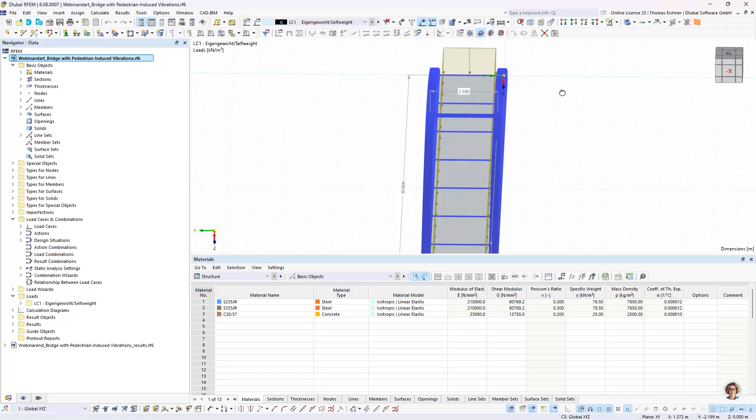connecting those HEB 300. Also in the middle you can find a reinforced concrete surface, flat. It's just 10 centimeters C30/37, and it's just there to create our floor in this case.

For the loadings, it's really important for dynamics in general to try to estimate the real values that occur on the place, because from this loading we will define the masses, and if we get the mass wrong, you can't really use the results, right? So for this model, we will take the self-weight and some dead load that accounts for permanent loads that are built on the structure.

Now we could also think about, for example, giving it a snow load on top, right? But it would change the dynamic behavior of the structure, since the masses are different in that case, but more than 3/4 of the year there wouldn't be snow, so it's not really a good approach in this case. So we're going with these masses here.

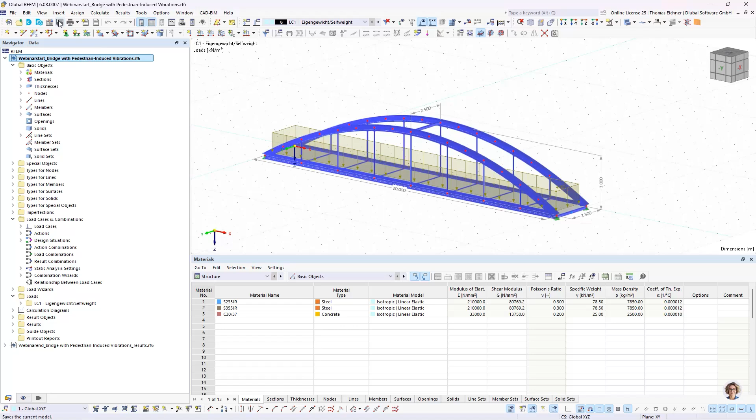Okay, so in the first step, we will try to calculate the eigenfrequencies of the structure, which means we will have to go into our base settings of the program. With the base settings, we can go into the add-ons, and all the dynamic analysis add-ons are within here. You can see the modal analysis, response spectrum analysis, time history, and so on.

And in addition, we have also a special solution add-on that's at least an honorable mention. It's the building model. The building model can simplify, for example, an 8-story reinforced concrete building by using rigid diaphragms into an 8 degree of freedom system. So it can help you simplify a system to be able to interpret the results more easily.

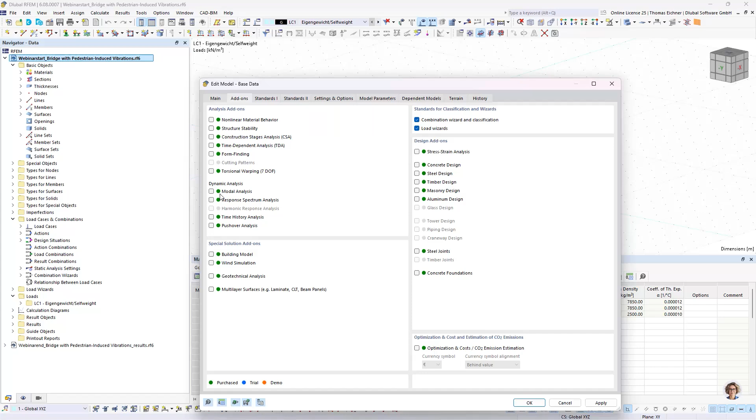So we will start with the modal analysis right here. I'm going to activate it, and we're just going to go through it quite fast. We're just going to create this new load case here of type modal analysis. We will create modal analysis settings, and now we will go for 20 eigenmodes. We will go for full consistent mass matrix, no neglection, only loads in Z direction. So quite standard settings here.

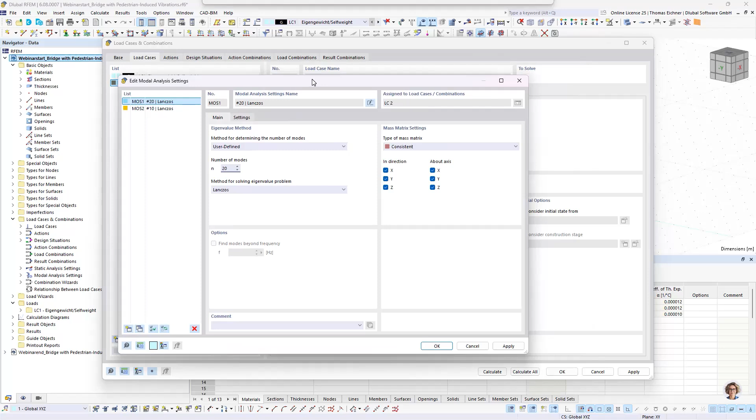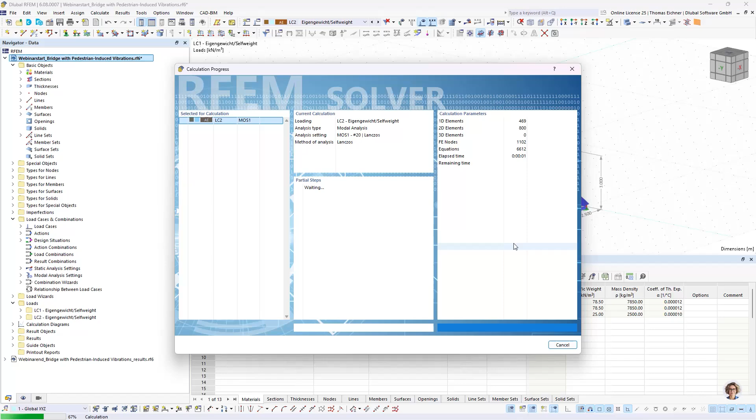There are more explanations on that in our seismic webinar, so feel free to watch that as well. Okay, with that done, we also picked for our masses our only existing other load case. So that's quite easy in this case. And we can just go into the calculation. That should be quite fast, I think about 5 seconds. That's it. Okay, and then we can investigate our eigenfrequencies right now.

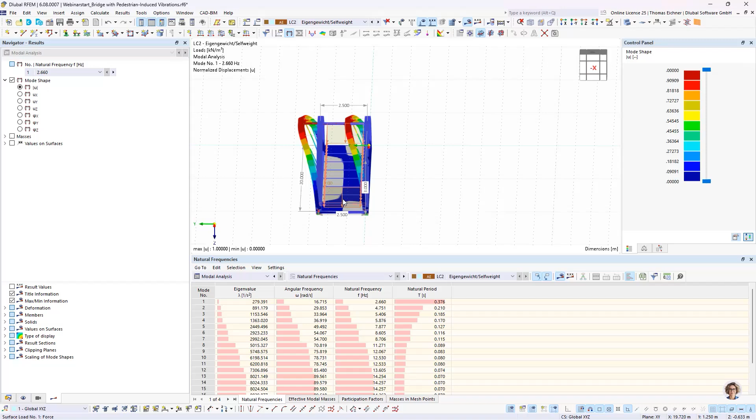So the first one, well, let's first think about what we're gonna investigate here. We wanna have the walking induced vibrations. That means we will apply a foot walker in the middle here, and he's gonna walk over time over the whole bridge. That means we have a vertical loading here, 1 time for the right foot, 1 time for the left foot, and so on.

That also means that, for example, this eigenform does not move in any way in the direction of our loading. So it won't really have an impact on our solution here.

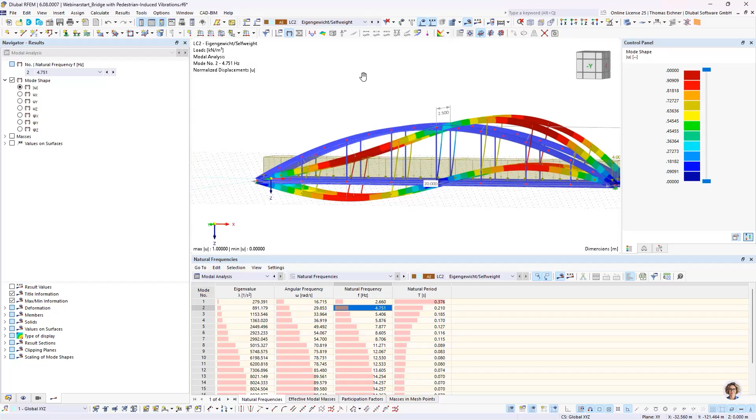That means that eigenform is just not important for us. Let's look into our second one, and that's where, well, it changes. Now we have vertical deformation of the structure, and it's in the same direction as our loading. That means this will be a quite dominant eigenfrequency for our results later on.

And let's also see, this is now our smallest relevant frequency with 4.75 Hertz. Well, the limit value is 5 Hertz, where you don't need an acceleration check. In this case, we are below this 5 Hertz. That means we need this acceleration check, and that's why we need to perform this time history analysis in the following.

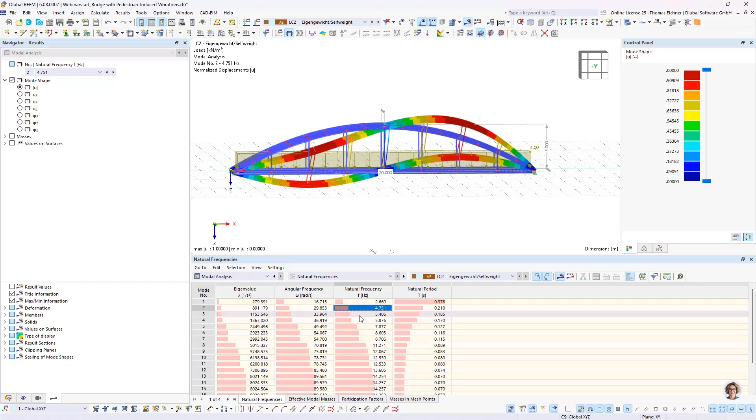So let's also look into some tips how to find relevant frequencies. Maybe you know it from the seismic webinar already. We have also those effective masses here available. And we see now our second one has like 55% about the y-axis, which is quite right. And with that, we know this loading is of importance. So around the y-axis is important for us.

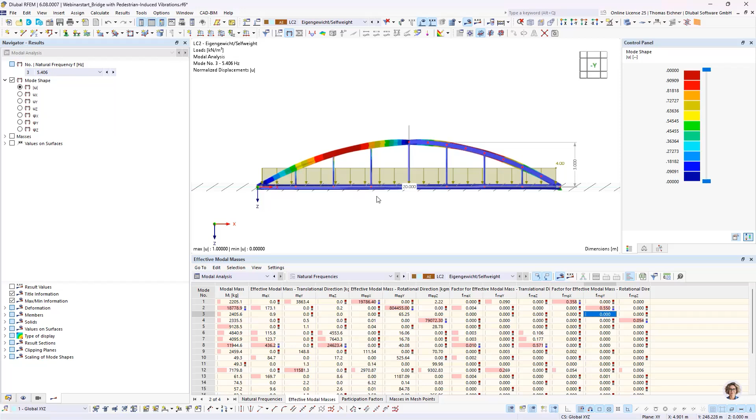So everything that has something in this column. The next thing, of course, would be the Z direction, which is this column. And there we see, for example, the 8th mode has also a deformation in the direction of our loading. And here, just another tip, it's not that simple as in the earthquake analysis, where you have the masses all existing and the masses creating the load. Here you have another load, and only eigenforms that depict in that direction of the load are of importance.

Let's also assume, for an example, in this case, we have a walker that walks over that bridge, but we try to perform the analysis by simplifying it and putting him just on the middle node. Well, then the results could also be not so trustworthy, in my opinion, since let's look at the second eigenform. We have no impact of this eigenform for loading in the middle, and also with the biggest eigenform of the z direction, we also have no impact on this middle form.

So you could almost also put the loading on the support, right? Not exactly, but like for simplification. So here I would recommend really to investigate your own loading and your first frequencies.

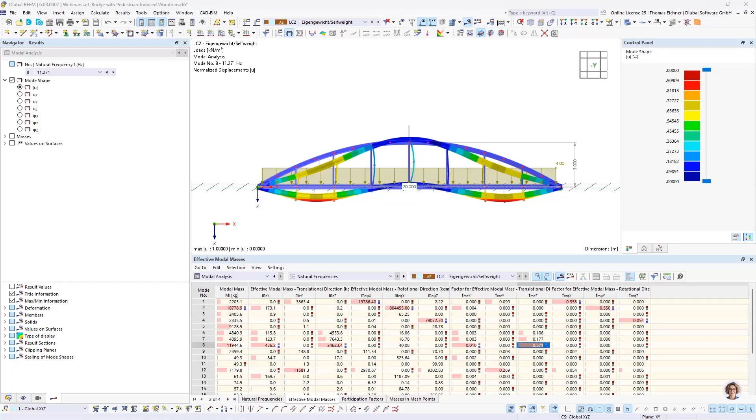Okay, then we can go into our frequency investigation further. We will need our dominant frequencies. That means we have this one with 4.751 Hertz and this one with 11.271 Hertz. And those two values I will keep in my head, since I will use them later on for the definition of damping. Okay, let's go on with the theory.

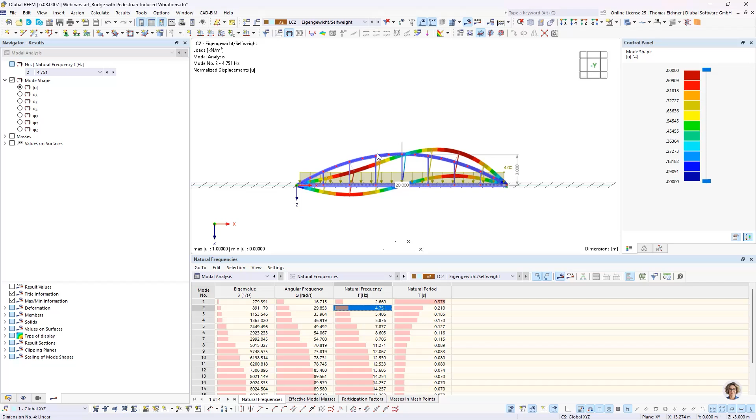Now we will try to apply our footwalker forces on the structure. And we have it right here. That's the vertical loading of the walking. It's referenced to a German literature, Bachmann, 1988. It's the original text. There are also newer texts from 2004, but he references a lot to this 1988 version.

However, there are a dozen different possibilities, or let's say literatures, to define the time function for a footstep. So this is just an example, but you could use whatever function you like for the definition. But we will go with this one. So let's go into this function for a second. We will only think about the descriptions below first.

What we have here is he gives us a step length of 0.6 to 1.0 meters. And for the first part of this walking, we will only look at the local placement of those loads and not about the time. So we don't care yet about the time, and we will only look at this value, and we will pick a step length of 0.625 meters.

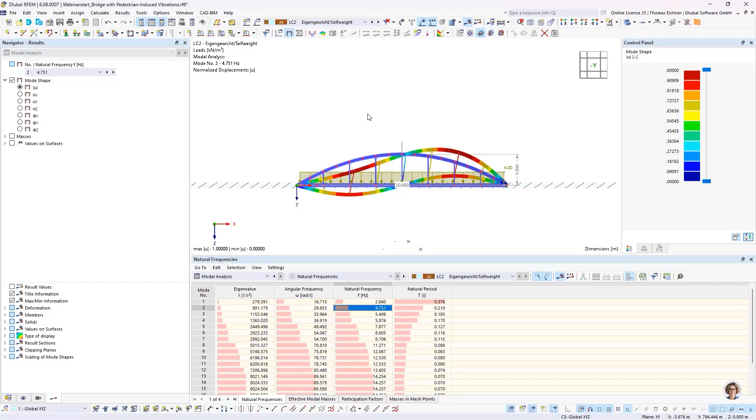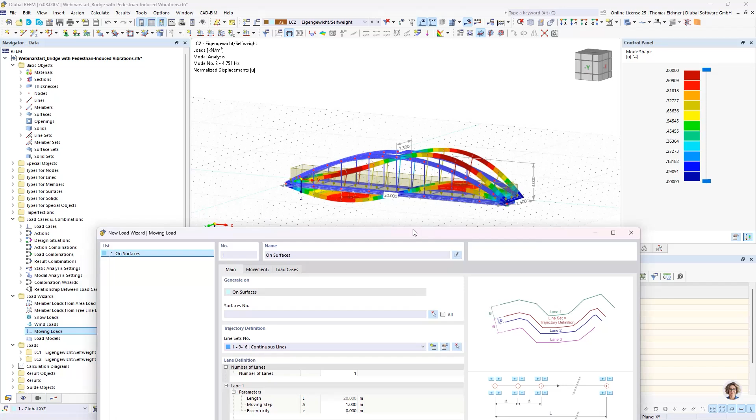So we will go in again. We don't need the time history analysis add-on activated yet, because this can be done even with the basic RFEM. This is just a load wizard, and we can find it within our load wizards in the data navigator, and there we have this moving loads option. With that moving loads option, we can just define how our load will be placed. For that, we need first some reference lines, and those reference lines can be picked right here in this line set.

I did pick them already, but we can also look at them. They are just the lines of the left side of our structure in this case. So we will set the parameters of our walker location with reference to this line. Quite simple. That's also called the trajectory definition, and we can also see it on this image on the right side below, trajectory line.

For the next step, we will have our moving step size. Now this is 1.25 meters. Why? Because we have 2 feet, as I just explained. Between the right foot and the right foot, there's 1.25 meters. Next, we will go with an eccentricity. That means the distance between the trajectory and the place of the loading.

We know the bridge is 2.5 meters in width. With that, we can say we will use 30 centimeters horizontally between left foot and right foot. That means we need here 1.1 meters. And we will have an offset of 0.625 meters.

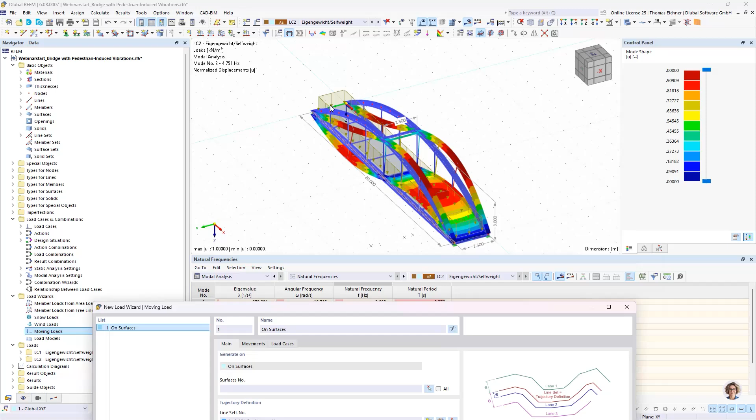That's just because I don't want the load starting right at here or here, because that's just not needed. I assume that's just not dominant for us, or just not having a big impact on the results in this case, since the supports are just next to it, right? But with that we have the geometrical stuff given.

The only thing more is we need to also select the surface to apply those loads on. Lines will be possible also soon, just as a hint, so it's not only restricted to surfaces. And with that we have everything done here. Now we have to define our load.

This can be done here by picking: we have one lane with a load factor of 1, that's okay. Now we can create our new load model. This will be just a single foot walker in our case, and we will go for a unit value of 1 kilonewton. In general, we would want to use 0.8 kilonewton for the loading of the foot walker, but we have multiple ways to achieve it.

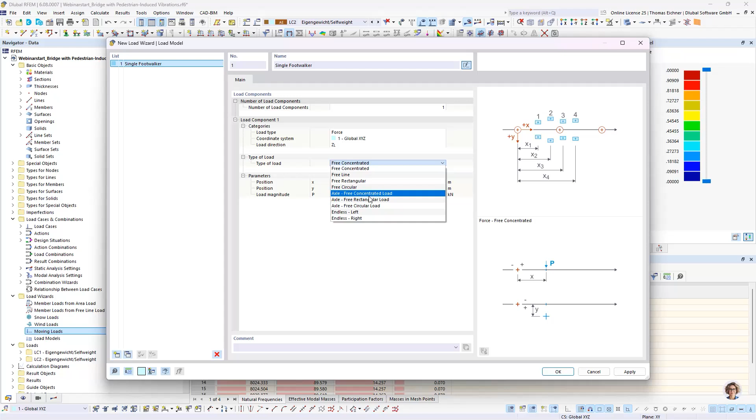We could place 0.8 here, or we could place it in a time diagram, or there are some factors in the program, and you can decide on your own where you want to have the right value, and for all the other values you would need to use unit values. So we will use the unit value here, and I will show you the 0.8 later on in the time diagram. Just for your information, there are also several loads. We could also go for axle loads for vehicles, so a lot more features are available within this load wizard.

So we have the first one, and this will be our right foot, and we will directly copy it. We can also look at the right foot again and in our load cases. There we will see we now have 16 load cases created for us. Because we are in dynamics, I'm going to set them to seismic actions. We will look at the loads graphically as soon as we have the left foot as well. So let's call this left foot.

The loading model stays the same, so the moving step is okay, and we have to adjust the eccentricity, so we need to add these 30 centimeters. Now I'm thinking I did something off here with this value. No, that's quite okay. 1.1 meters, then 30 centimeters, so we will need 1.4 meters right here for this eccentricity. That means we have 30 centimeters between the 2 feet.

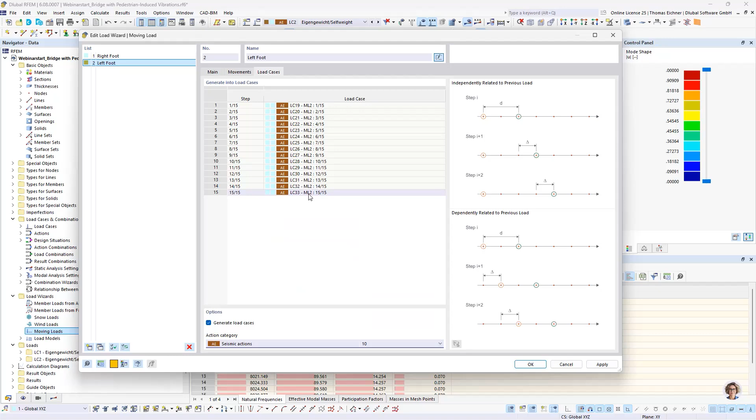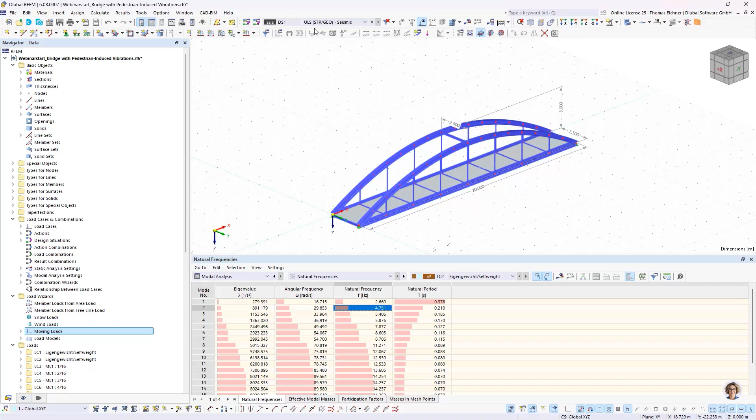With that done, we can go from this side like this and start our animation for our loading. We could also change the speed here, make it slower and everything. But yeah, that's our loading. We also see our trajectory lines here. So we will have this foot walker in the middle, and he will just walk straight up this bridge.

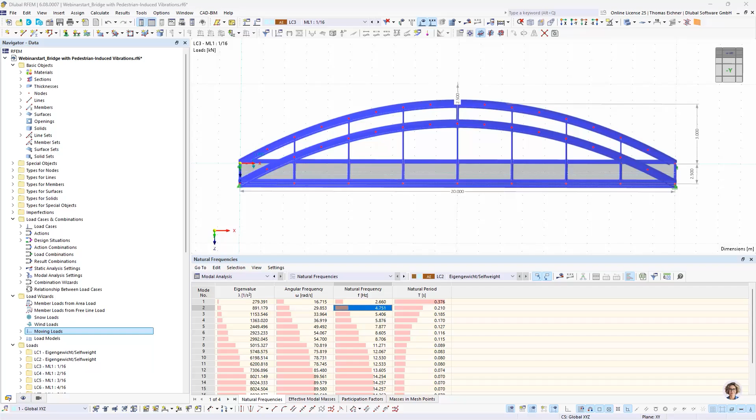Okay. So now we have the locations of the loading, and now we need to take care of the time of the loading. When will it appear, and how long will it appear? For that, we will go into our equation again. And for those who already know it, this here is a Fourier series with 3 harmonics. We have here our step frequency, Fs. We will pick it as 2 Hertz.

This rest here is just a transformation into angular frequency and Fourier coefficient, or it's like the weighting coefficient. And we also have a phase shift. So, therefore I prepared some simple Excel for some understanding here. What I did here is I just plotted those 3 parts of this Fourier series. This means we have the first harmonic. This will have an amplification factor of 0.4.

We have the second harmonic with 4 Hertz. So the first frequency here is 2 Hertz, the second frequency 4, and the third frequency 6. They are called first harmonic, second harmonic, and third harmonic. And we have also a shift of π/2 for the second and third harmonic. We can see from the step frequency itself that our period is 0.5 seconds. So we will also have a 0.5 seconds length for each loading.

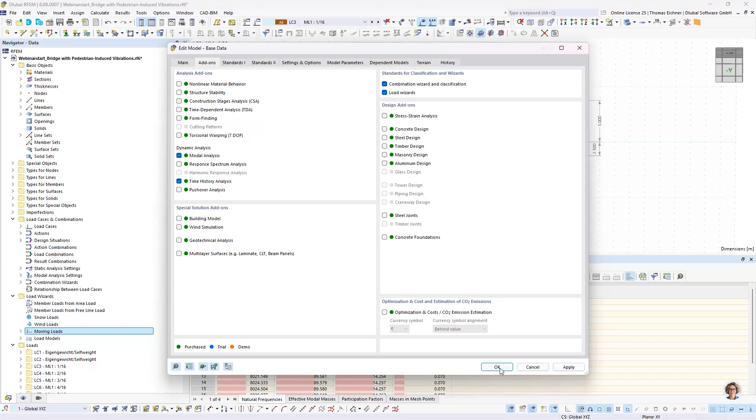Now we can go back here. We can also see big peak and small peak. And let's just define it in our software and inspect it there further. So at first we will activate our response spectrum analysis. And with that, I meant, of course, the time history analysis. So we will activate our time history analysis.

And as a hint, you can also find our dynamic loads on the left side in the data navigator. And we could just change time diagrams really fast by accessing them with the data navigator. It's, in my opinion, the fastest way currently. However, we will go with the ones in our load cases and settings. And yes, so we will start here. First, just some general information.

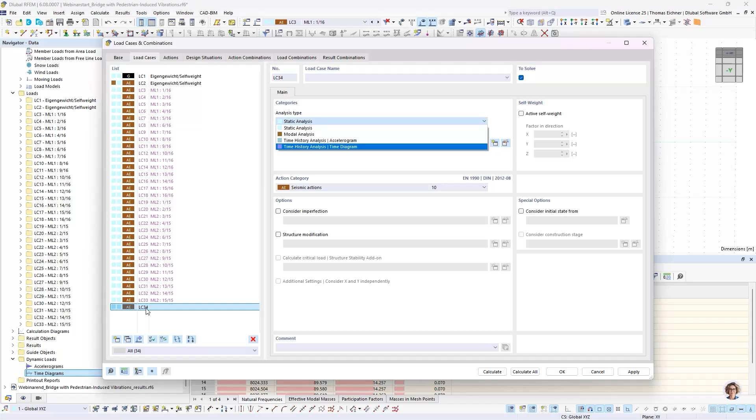We can create time history analysis in load cases. That said, we can create, let's say, the time diagram one, where we would select a time diagram, and all the loading that is defined within this one single load case will be modified with that time diagram. However, we have, I think, 31 load cases, and that means we will have to go with the load combination variant, where we can assign multiple load cases and time diagrams.

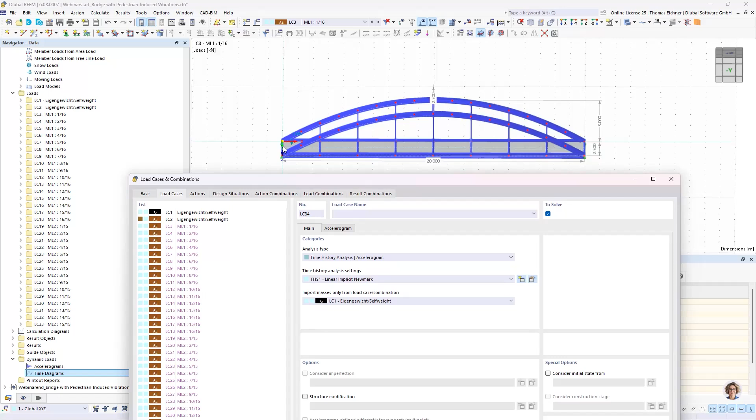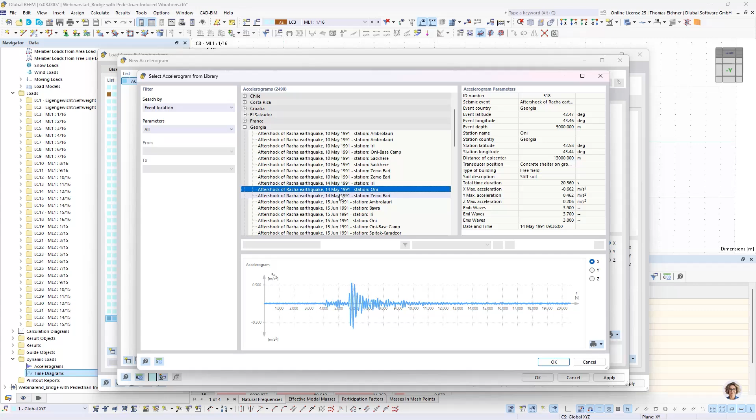Okay, so for the next thing here, what we also can do is select the time history analysis of accelerograms. The good thing is, we don't have to take care of the placement of the loading, because it's just prescribed by ground motion and supports in this case. And with that, we can create accelerograms either with the table, or we can also, of course, take our really quite big accelerogram library here. Quite easy. Just pick the one you would estimate, and then you could investigate the behavior of the structure under this accelerogram. Okay, but that's not the thing we need today.

So I will delete this load case again, and we will go into our load combinations. In our load combinations, we will create a new one that is called time history analysis.

This one, we will ignore this first page for a few minutes and go directly into our assignment sheet, since we don't have something to do with the time history theory yet. We are still just in our loading. So we did our placement of our loadings, but now we will also have to apply the time, so we will have to apply this function according to Bachmann.

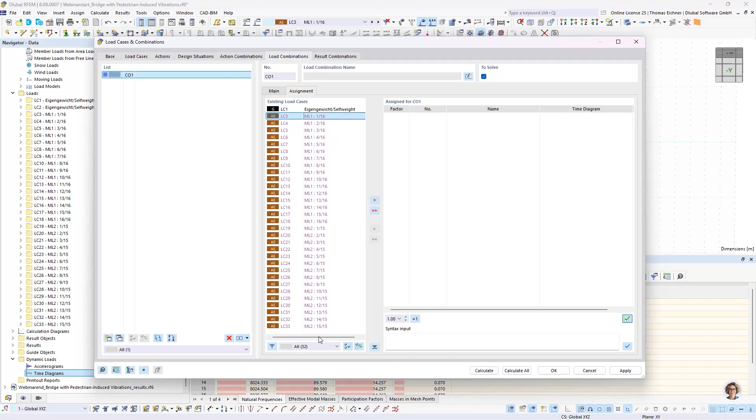And with that said, what we want to do is apply all of our load cases right here. Now we see we have all 16 right steps and all 15 left steps here, and we can assign them like a time diagram right here.

With that, we will go for a new time diagram, and I will just copy paste my function in here, since that's a lot of typing in this case. And there it is.

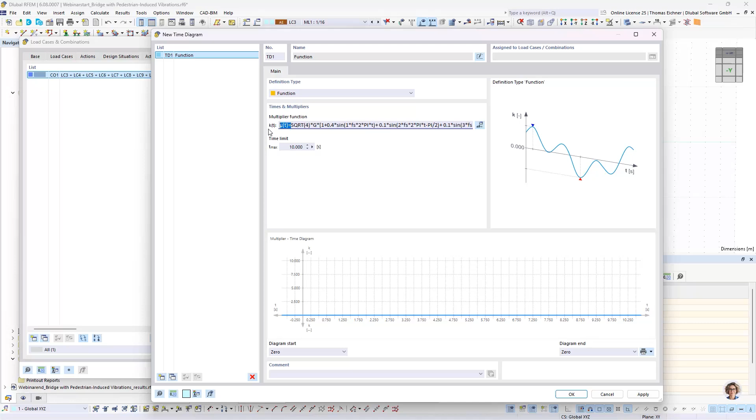What we have here now, we also multiplied it with the number of our footwalkers. We multiplied it with our factor g, and we took the function with the Fourier series in it according to Bachmann. What we now see here is we have a factor of 2000, so there seems to be something wrong.

And that's within the used global parameters here. So I used n, I used g, and I used fs. And now let's look at them.

Since I predefined g with 0.8 kilonewton, but this is just a function, so it's dimensionless, the program will automatically calculate functions within SI units, which means this is like an 800 in this function here. It means we will have to divide it by 1000.

Then we also selected the number of footwalkers, which is 4, and the step frequency of 2. That means if we want to change the step frequency in the end and just press calculate again, we have the results for it - that is possible with this global parameters quite easily.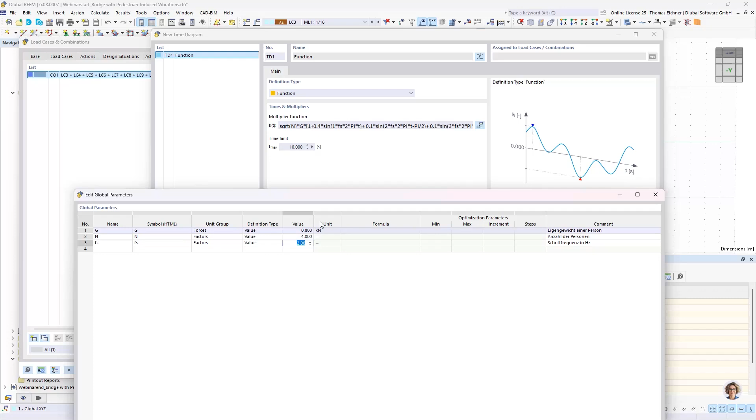Okay, so let's go first for this G adjustment, and then I will explain something about our number of walkers. This divided by 1000.

T max is 0.5, since our length, our period was 0.5 seconds. There it is, big peak, small peak. And we have a maximum factor of 2.5.

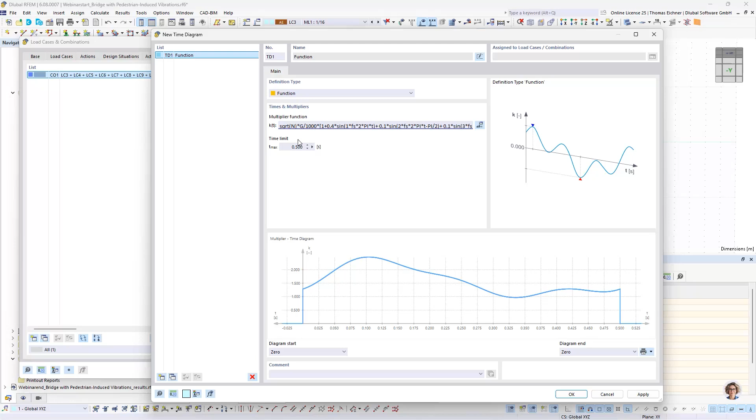Mainly because of this dependence on the number of walkers. So it would be between 0.8 and 1.6, I think. Okay, but with that the function is defined.

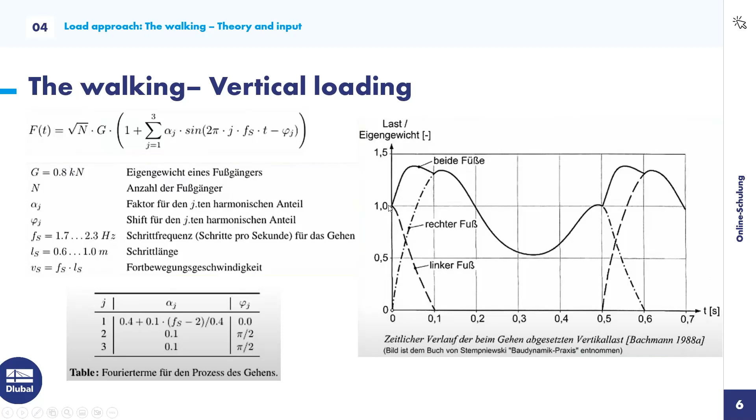Now let's look into our walking theory again. Just as a hint, there's multiple functions for that available - also for horizontal loading, where the influence is quite lower, and also the frequencies are kind of split by half for it.

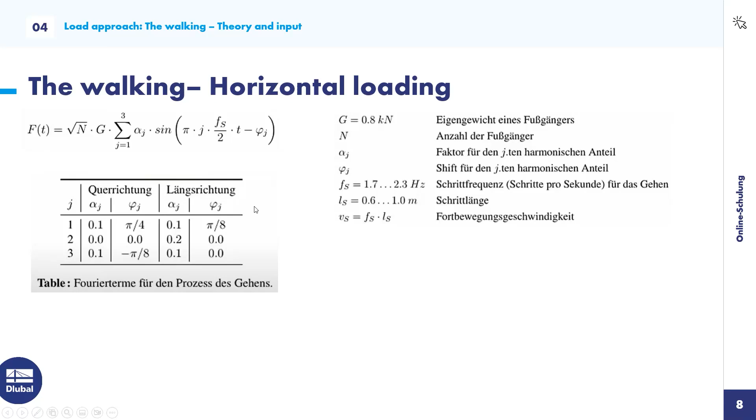And there are also functions for jumping or running. For jumping and running, there's one more benefit, and that's that there are time intervals where no loading is on the structure, because no foot touches the structure.

Okay, let's go for the amount of persons. Well, in general, we have to design for reality, and it's common that not only one person walks about the bridge, so obviously we have to take this also into account.

Multiple persons normally don't walk synchronously. They just walk on their own, and it's quite random, except for military structures where you have an army marching over the bridge. Then this synchronous increasing could also be necessary.

For this today, we will consider the change in location. We have a change in the loading location. And therefore, if our fundamental frequency would be below 2.4 Hertz, we could go for n is 4. We will also go with this simplified approach.

Generally, the number of persons is limited to 9 persons. And the main thing I read about is that this value is estimated by what's estimated to happen, right?

So if you estimate to have a bridge in a rural area, you can go with quite less persons than if you compare a bridge in New York or something. So that's something you just have to take into account here.

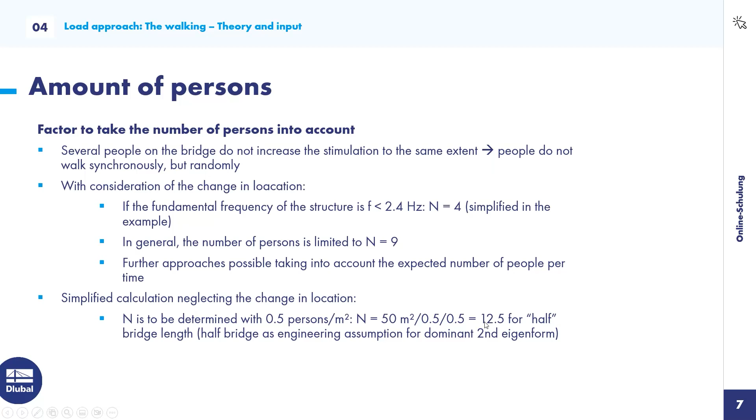Okay, let's go into the program again. That's where the n comes from, right here. So now we have selected one time diagram only. We will select it for all of our time functions, and now that's the great benefit in comparison to RFEM 5.

One more thing here is we need to also apply our time stepping, or time shift. This time shift is new within RFEM 6, that we can define it directly in this table.

Now I will just go. The first right foot is at 0 seconds, then the second right foot at 1 second, and there's always 1 second between, right? So we will just fill it up to 15. Then our first left foot starts at 0.5 seconds, and then we just need to increase that always by 1 second again.

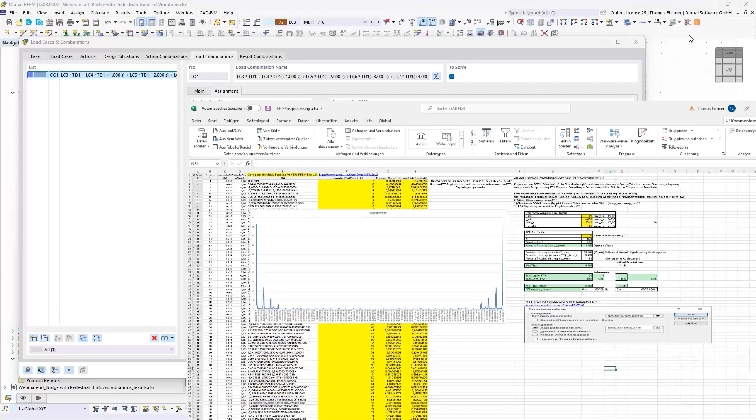So with that said, this is really a great benefit within RFEM 6 right now with this time shift option, because as you can see, we're done already with the assignments. Now we only have to take care of our analysis itself. I'm just gonna go here and go for the linear analysis.

So now we can go on. We have two time history analysis settings, right? One is the linear modal one, and the second one would be the linear implicit one. The modal one uses a modal analysis, which we pick right here, and it also takes all this information - consider initial states, structure modification, and the masses - it just extracts them from the modal analysis.

So the setting making is really simpler, but on the other hand, you had to create a modal analysis beforehand. So you did that kind of before already.

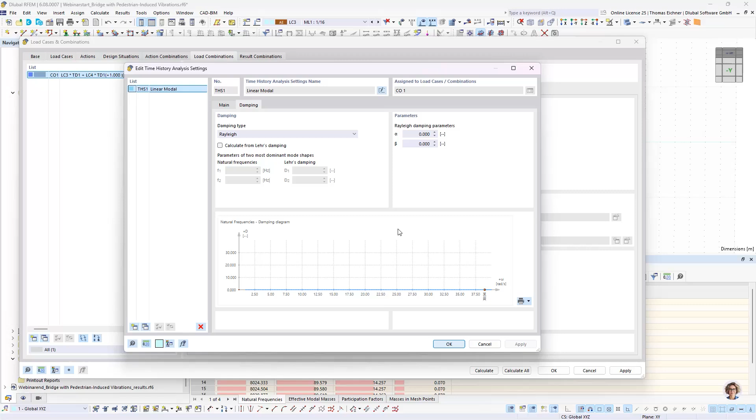Now we can go in and look at the next benefit of this solver type, and that is we can either use Rayleigh damping, but that's not the benefit. The benefit is we can also use a constant Lehr's damping value here, and we will use that, and I'm quite happy whenever I can use it, because we will use 1% damping for our structure here.

From literature, I saw that is quite high, so I would recommend to look in the literature on your own projects for it, because this, I think it's about a factor 2 at least too high. But okay, let's go here now.

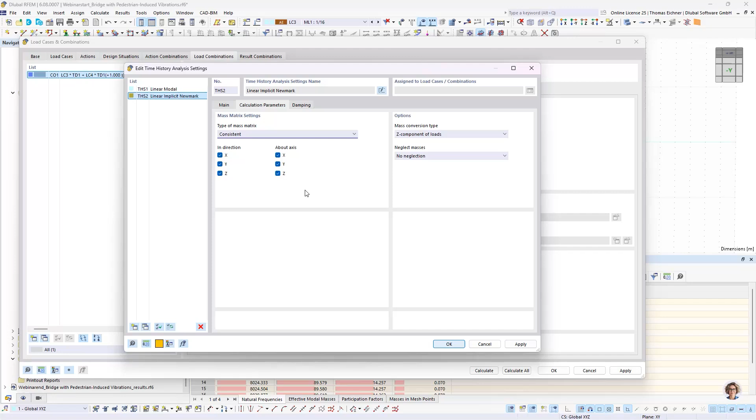We did the damping, now we can take care of our time stepping. But before we take care of our time stepping, I will also introduce you the linear implicit Newmark variant. With that, we have to make the settings for masses again, since we don't use a modal analysis in this case. And the sad thing, or the thing that sometimes occurs in some problems, is we have to use our Rayleigh damping, so our stiffness and mass dependent damping.

We can use two frequencies to calculate those dampings, so we will go here with 0.01, and here with 0.01.

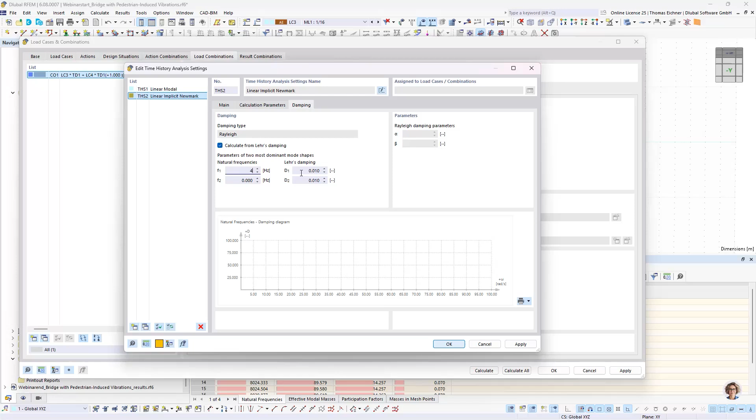And then we will select our frequencies, just think about taking them right in the modal analysis. Our first dominant mode was 4.751 Hertz, and our other one was 11.271 Hertz. There it is.

So now let's talk about this damping approach for a minute, since I see a lot of confusion on it. This damping approach is called mass and stiffness dependent damping. Mass dependent means the alpha value is just a factor for the mass matrix, and the beta value is a factor for the stiffness matrix.

In this way, the damping matrix can be described as a combination of those damping matrices. For the alpha value, what it does is shape a frequency curve that starts at infinity, so the asymptote here would be the y-axis, and the asymptote on the x-axis is the x-axis. The beta value adds an additional asymptote beginning from the origin, with a slope defined right here.

So as soon as you enter beta damping, and you would have an infinity frequency, this infinity frequency would have an infinite damping, kind of. And that can lead to problems, at least in non-linear time history.

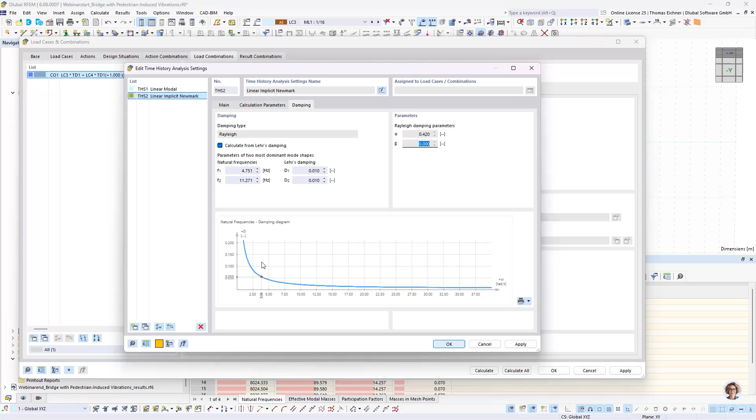Okay, with that done, we can go out of here as well, and we have now our two analysis settings. What we didn't do yet is think about our time settings here. Well, this is quite important, one of the most important things within the time history analysis: the time step choice.

It's a trade-off between the accuracy of the results as well as the calculation time. You have to think about each time step as comparable to a normal static analysis, a little bit more complex since the dynamic equation is a bit more complex. For each time step, you have one of those analyses after each other, because you can't do it in parallel, you have to do them after each other. And that's something where the calculation time, unfortunately, can explode.

Okay, so here are just some recommendations. If you have a function-based excitation and in general have some knowledge on your frequency structures, mainly you always do a modal analysis beforehand. That means you would pick the highest natural frequency, and the time step is just the highest natural period divided by 20. That's the same as this formula: 1 divided by f is T, so T over 20. The same applies for the excitation frequency fe: also here, Te divided by 20.

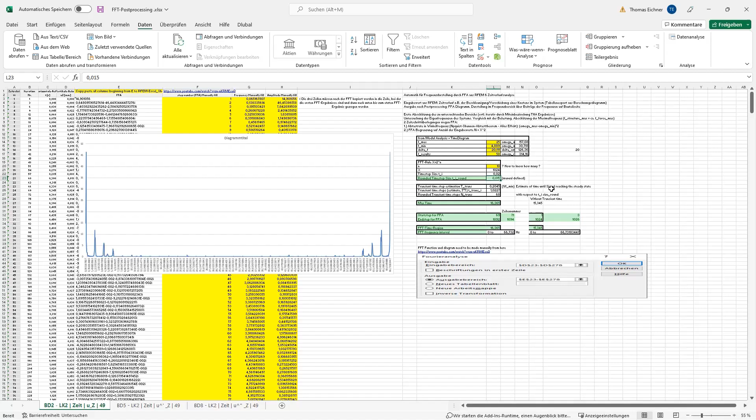And with that, I defined that we will take a 0.015 second time step. Oh, I'm sorry, I will go a bit closer here. So we will go with this 0.015 seconds time step, and we don't care about initial swings or the first few seconds, since they always have some strange results, I would say. But we will just ignore this, and we will take this into account anyway.

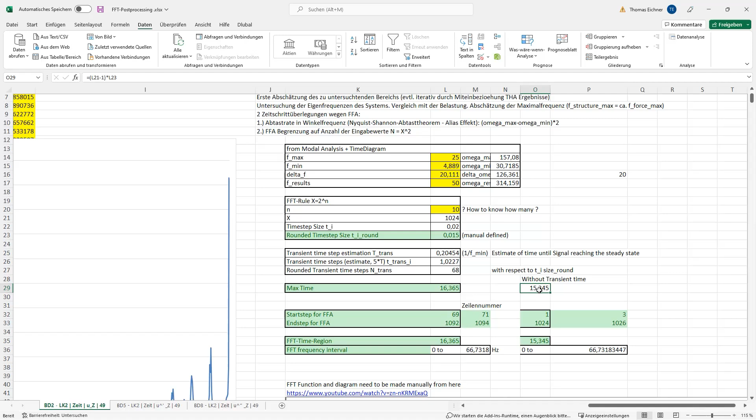So what we do here is, without the transient time, we have a maximum time of 15.345 seconds. This will lead us to a frequency range of 0 to 66 Hertz. And if you know something about this depiction, then that means we can investigate 0 Hertz to 33 Hertz with this analysis, with these settings.

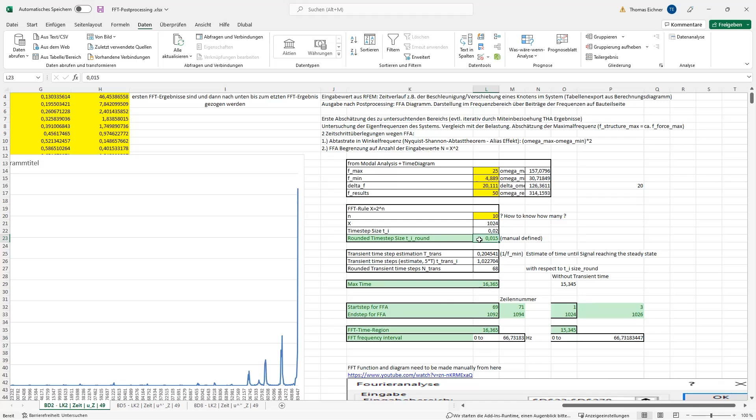Which means that helps us kind of. We know that 33 Hertz is our maximum frequency that is investigated. That means if we have some natural frequency of 50 Hertz, then we made some wrong assumptions here. Then we would need to readjust our time stepping. But okay, let's go with that into the program and just set this time step. So this is 15.345 and this is 0.015.

And this is the saved time step with 0.015 seconds. This is what produces our data. And this is our accuracy time step. That's used for the calculation. So with this combination, we have a calculated time step of 0.005 seconds. But only every third time step is saved.

That's something just since every time step has quite a lot of results. It is needed to reduce the data size. Like 20 gigabyte models can happen in this analysis quite easily. So that's really a point here.

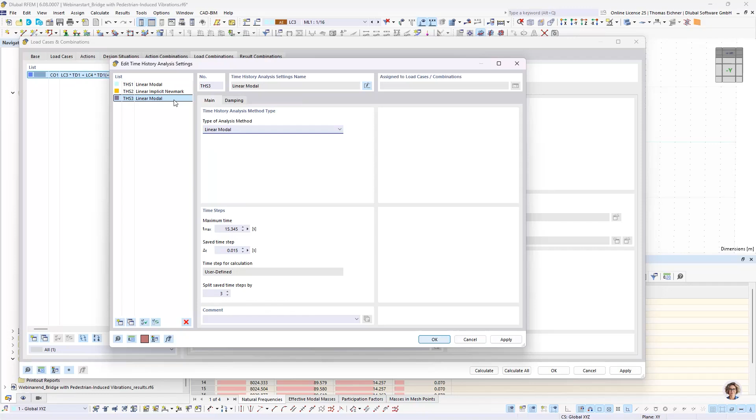Okay. We will do the same with this second one, 15.345, 0.015, and 3. And just as a hint, if we just copy this analysis and would change it here to linear modal, it would be faster. Just an efficiency tip. Okay, with that done, we can click on calculate. And while it's calculating, I can go on the difference of those two analyses again.

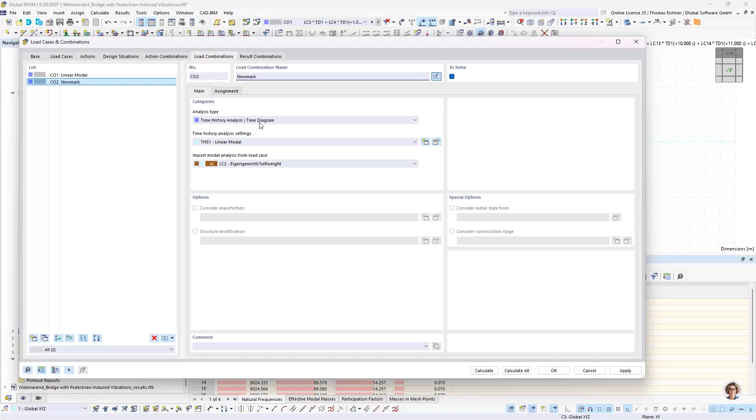Let's cancel it again. I did forget somehow one of those. Yeah, I just didn't do it. Okay, let's call this first load combination linear modal analysis. And then I did forget to apply a second load combination and apply the Newmark analysis settings for it.

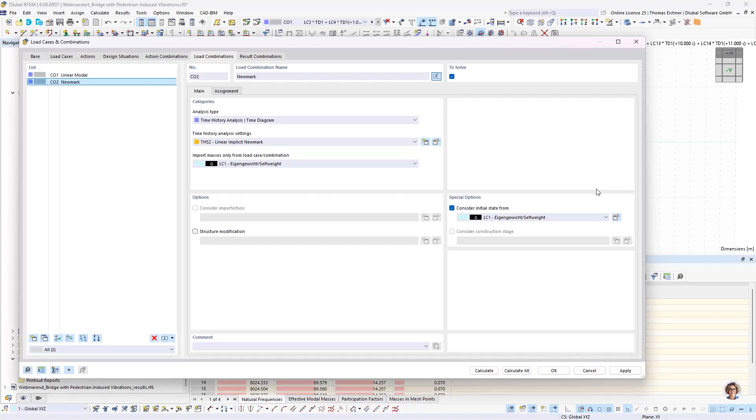Exactly. So here, as we see, we have to define the masses, a mass case in this case, and not a modal case. And we have access to our structure modifications as well as our initial states, final state type, and stiffness type. So that's also a benefit here, because in the linear modal analysis, we can't use the initial state and final state. Okay, with that done, now we can go into calculation.

And what we see now, the first one has already started to calculate these linear modal settings. And we see how much faster it is, right? So that's the benefit here. And the problem with this first one is we only have global damping, so either Rayleigh or Lehr's damping. That's a problem as well as a benefit, right? So we have a simplified possibility for considering global damping, but at the same time, we can't use local dampers.

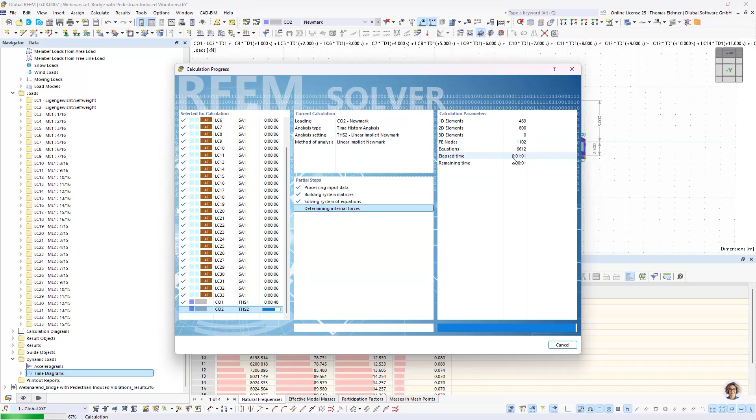Local dampers are only available within the direct time integration. So there are damping problems and benefits in both variants. Okay, let's see. I know it's gonna calculate like 115 or something, but I just wanna go on, so I prepared the results as well.

One thing I forgot in the calculation process: the time history analyses, you can run multiple in parallel, right? As you just saw, the linear modal one was calculated at the same time as the Newmark one. Since those calculations take quite a lot of time, one single time history is not good to split into different calculation processes. That means you would need one core.

I mean, you can enhance a bit of it, but in general, you have one calculation after each other. So if you just do multiple time history analyses, the time won't increase too hard, but in the end, you have different results on different investigations on the structure. You could use structure modifications where you increase the stiffness, for example, of all of those HEB, and so on.

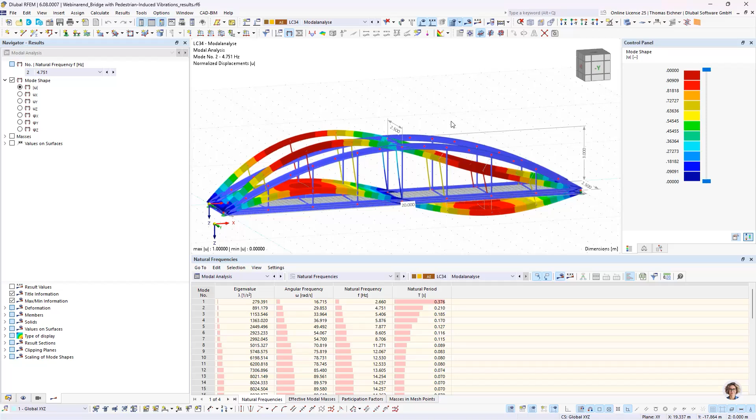So you could just think about what influence of some changes in the model you are interested in, define them before the first calculation, and go for four time history analyses with different structure modifications at the same time without losing too much calculation time. That's another tip there. And now we are almost at the end, I guess. So let's go into the time history directly.

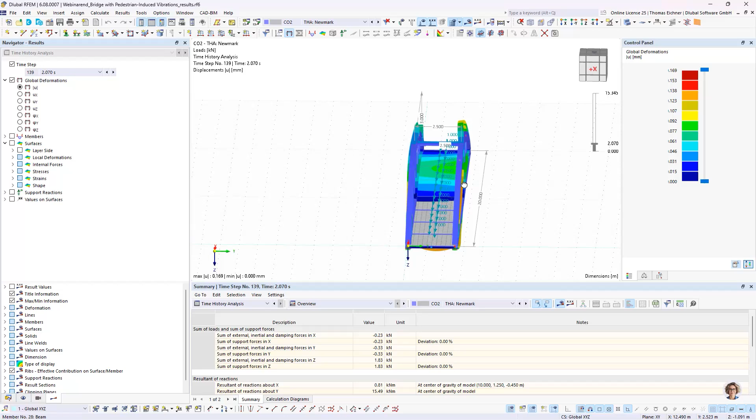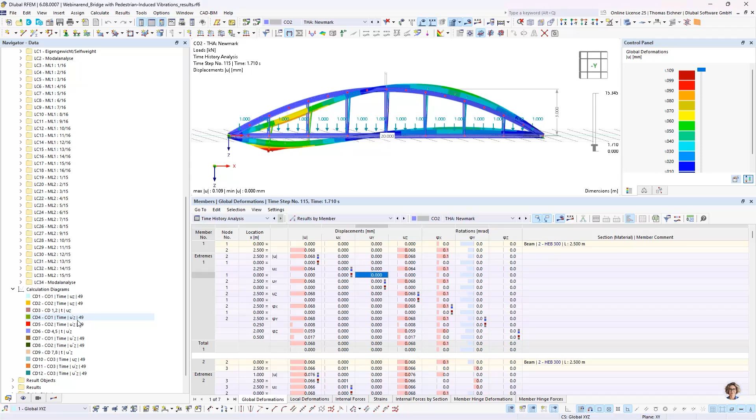What we see here, on the one hand, is our loading also. That's quite nice. Our loading steps are also here. And within the time history analysis, we have access to every result on the members or on the surfaces, right here, as well as all the graphical results. But as soon as you are interested in results over time, you would go into our calculation diagrams. And with that said, I already prepared some for your information.

As the node, I picked node 94 here. It's in the middle of the left side of this bridge, and that's the point we will observe. Let's go for the deformation. With this time diagram, we select the time history analysis. Time is preset. We have to select what we want to investigate, the direction, and of course the node. I did this already for the deformations, the velocities, as well as the accelerations. And now we can look at our amplitudes.

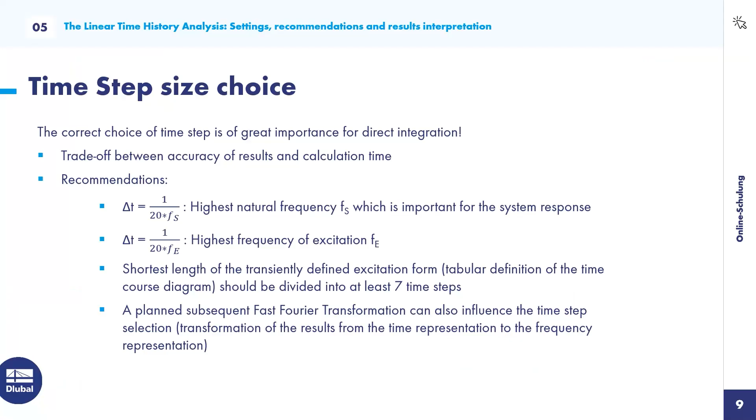And then we can also go for our accelerations. For that, we need to jump to the PowerPoint again. There are some limit values given for the acceleration for this check. Bachmann has one recommendation of 8% g, which means 0.8 meter per second squared. The Eurocode is a bit stricter with 0.7 meter per second squared, but let's just remember 0.7 to 0.8. That's our limit.

So we should think about changing the masses of the system or changing the stiffness of the system to influence the eigenfrequencies, or to have dampers placed on the structure.

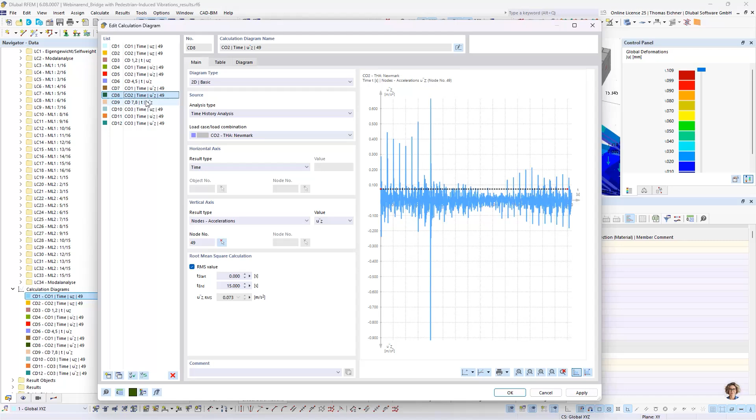Well, if I think about it, the one check is not fulfilled and this one is fulfilled, so maybe you should think about that as well. And okay. So for the last thing, I know we are a bit over time right now, but I will do it as shortly as possible.

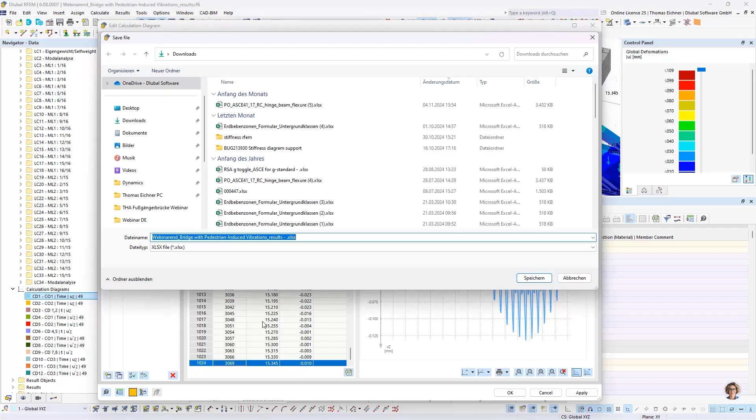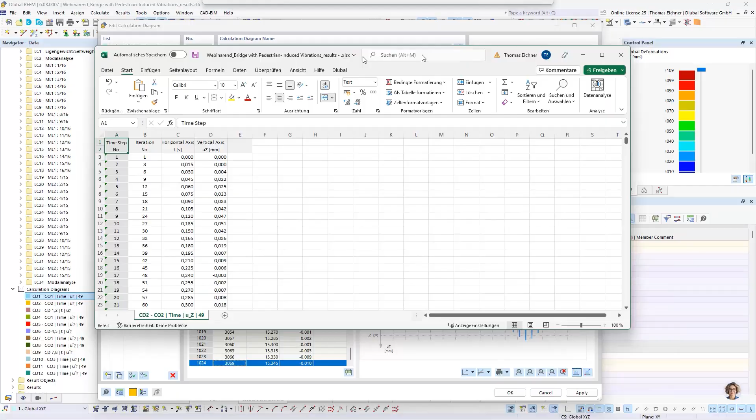What we want to do is now we take our deformation results from here. We can inspect the table. And as we see, we now have exactly 1024 values generated. That's because we did this time settings according to this fast Fourier transformation Excel sheet. And with that, we can go. Yeah, we can just save it. That's okay. And there is our table. Right here.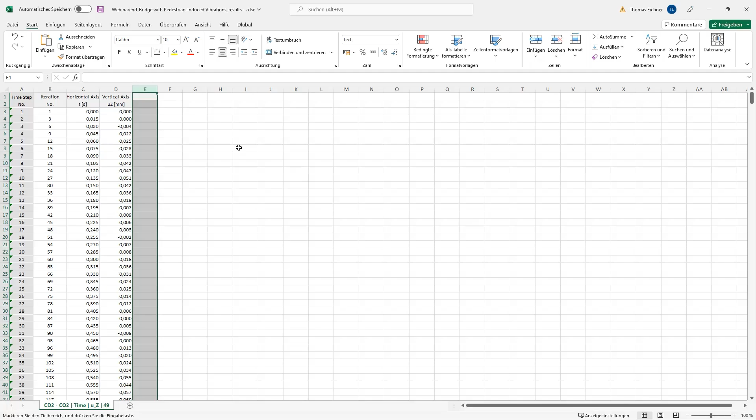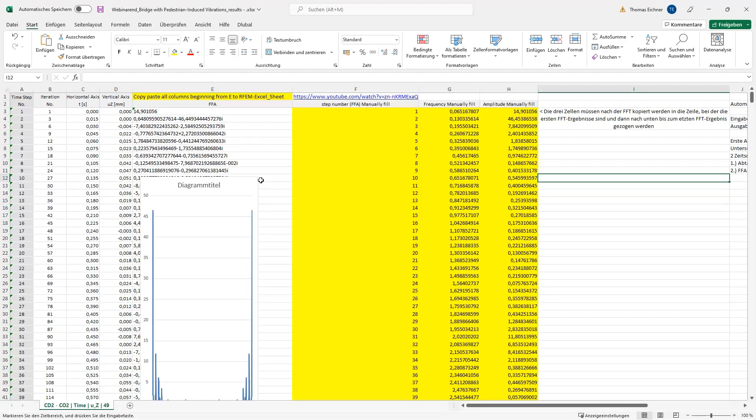Now, I will try to do this quite fast. The Excel sheet with the fast Fourier transformation you will also get. What I do is I copy from one existing file every column from E to, not to the end, just what's filled here, like this. Then, unfortunately, we have to delete all those existing results, as well as this one value.

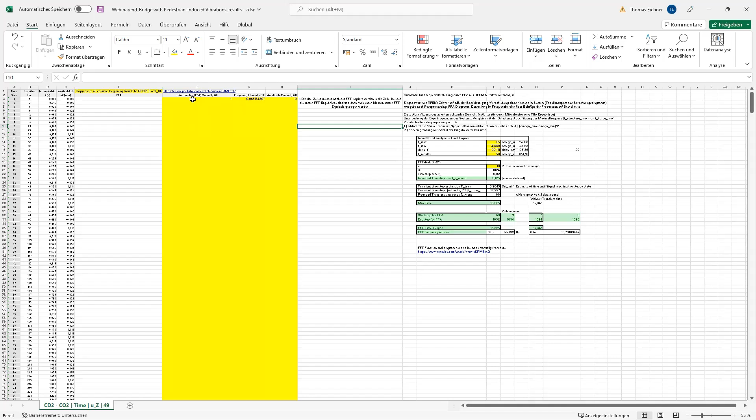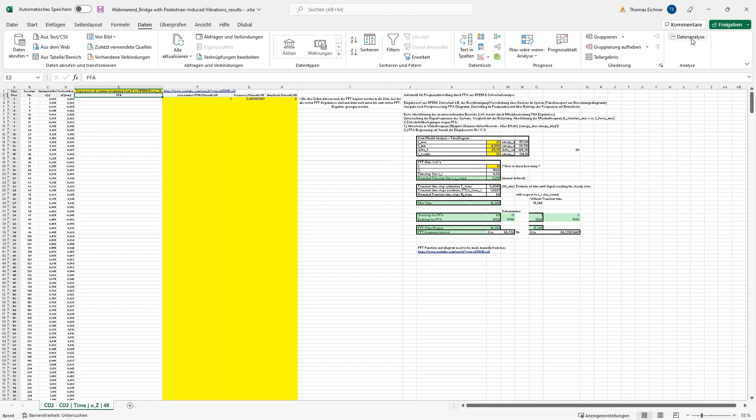Everything is explained somehow in German here, but I also added the links here on top where it's described in English as well. And it's quite important to use this link because you have to make this data analysis available within your settings. And with this data analysis, we can jump into our Fourier analysis. So for the input, I did take our UZ values. And for the output, I just picked the one on the right side.

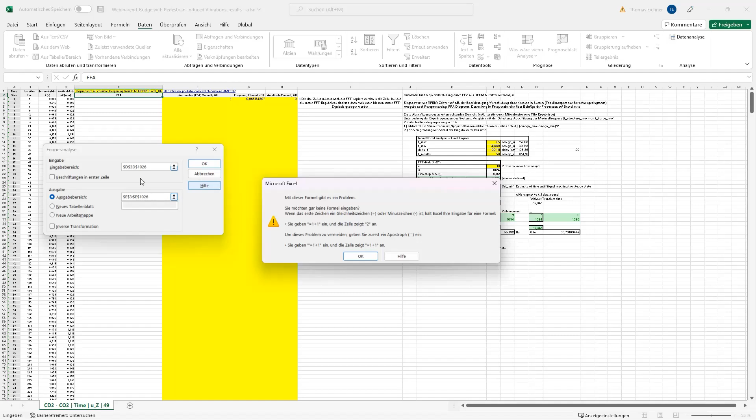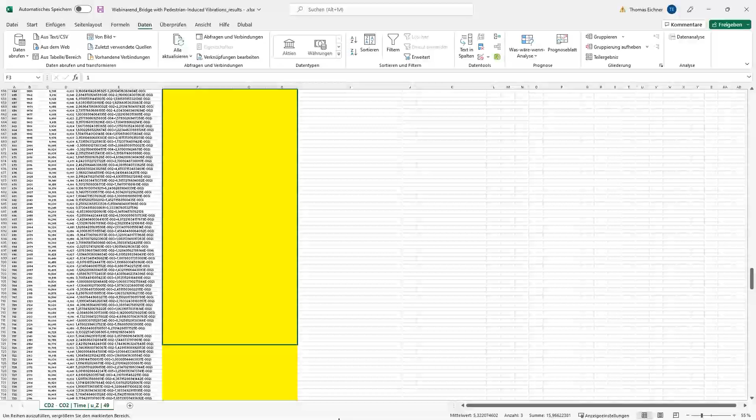And this Excel table also helps, it gives you, as you can see, D3 to D1026. I got those values here as well. Oh, now I changed something. That's not good. Now for D3, okay. We need a colon as well. Done. Now we can take those 3 that I left from the previous slide, just move it to the bottom. And then we can go back up again in those 2 columns.

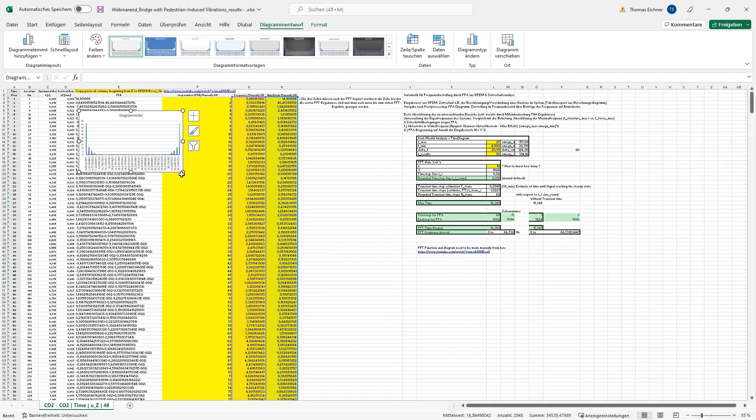Insert diagram, just one diagram you like. And there it is. We have our results in the frequency domain. So it's really done fast, in my opinion. This was 2 minutes, I guess, and we are in the frequency domain. So what we can see here now, we have the first point. I have quite some understanding issues there, so I can't really explain this first point in this case.

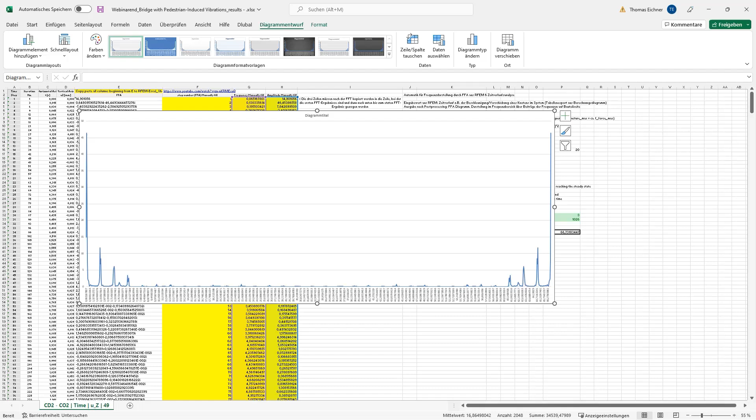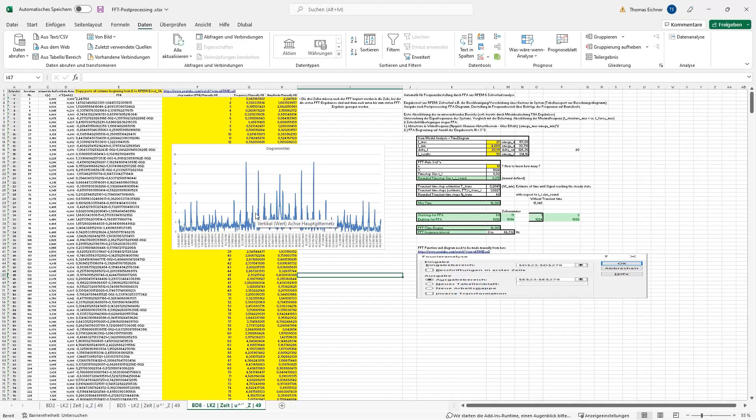But what I can explain is, for example, the second point, which is just the first harmonic, the second harmonic, and the third harmonic. So that fits the assumption that we had when we inspected our small peak, big peak displacement time diagram. Okay, I did the same also for the acceleration as well as for the velocities. But to be honest, I can't explain them correctly. So I think some of you could explain it way better than me. Okay, that's it.

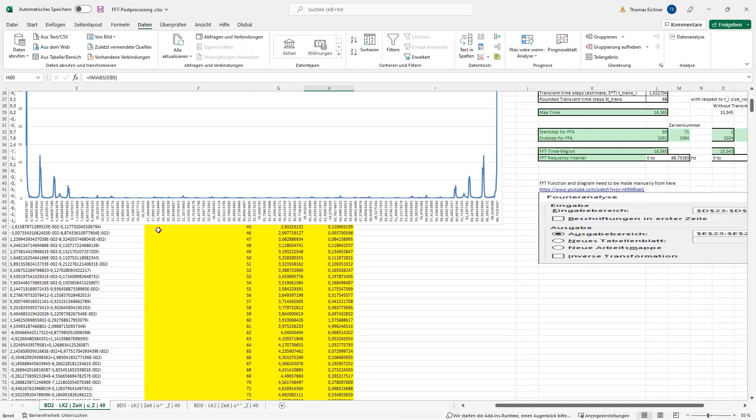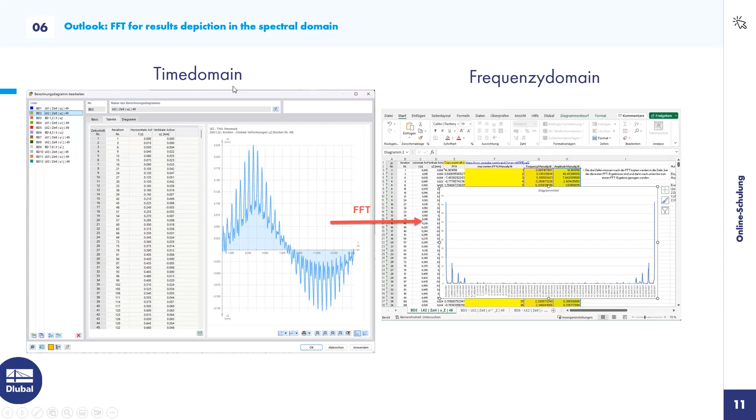So with that, we can go back into our PowerPoint for a second. We have our acceleration limits. Now I also did show you the transformation between the time domain and the frequency domain. And in the end, I also want to give you the list of the literature used for this webinar. And it will also be sent to you afterwards. You will also be able to download the model as well as the slides and everything.